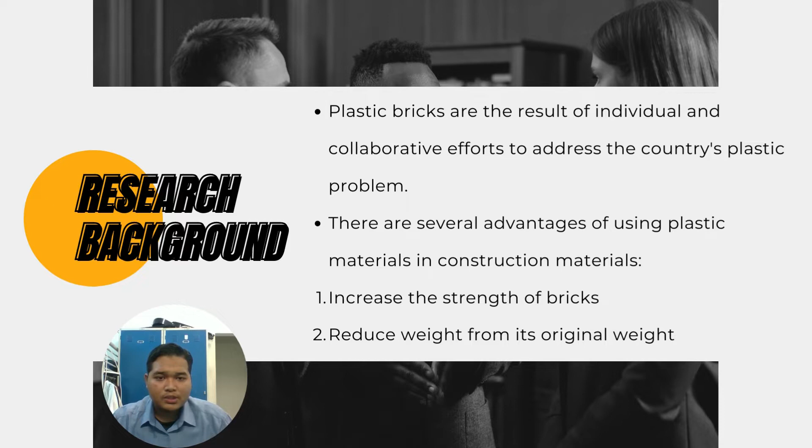Plastic bricks are the result of individual and collaborative efforts to address the country's plastic problem. The plastic brick movement advocates the personalized plastic brick technique in order to raise awareness of the implications and risks of plastic consumption. It also urges communities to take collective responsibility for their own plastic and use them to make valuable items through a collaborative process. There are several advantages of using plastic materials in construction materials, which is to increase the strength of bricks and reduce weight from its original weight.

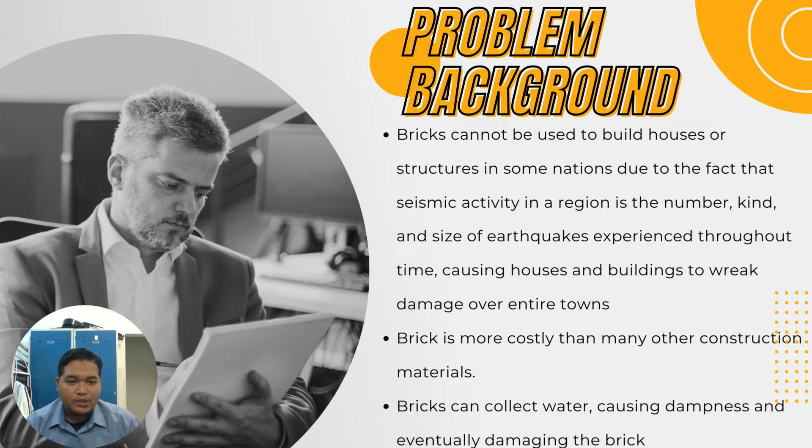The problem background of this research is, firstly, bricks cannot be used to build houses or structures in some nations due to seismic activity, the number, kind and size of earthquakes experienced throughout time, causing houses and buildings to wreak damage over entire towns. Secondly, brick is more costly than many other construction materials. And thirdly, bricks can collect water, causing dampness, which can impact the brick.

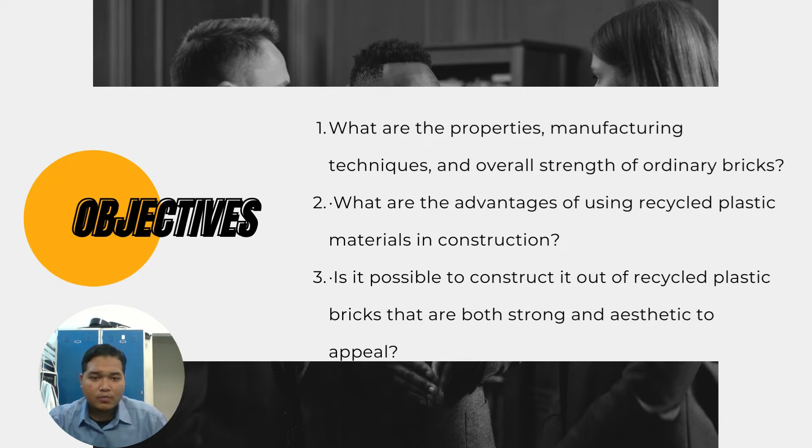Now we will move to the objective. There are three questions in the research. Firstly, what are the properties, manufacturing techniques, and overall strength of ordinary bricks? Second, what are the advantages of using recycled plastic materials in construction? And lastly, is it possible to construct recycled plastic bricks that are both strong and aesthetic?

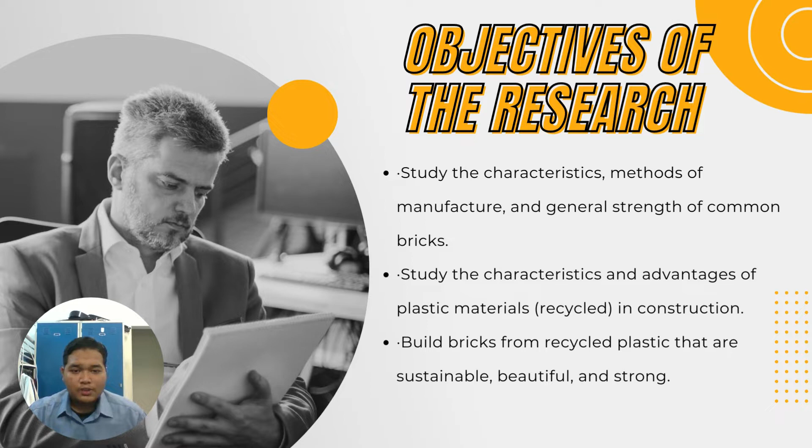Now we will move to the objectives of the research, which are to study the characteristics, methods of manufacture and general strength of common bricks, to study the characteristics and advantages of recycled plastic materials in construction, and to build bricks from recycled plastic that are sustainable, beautiful, and strong.

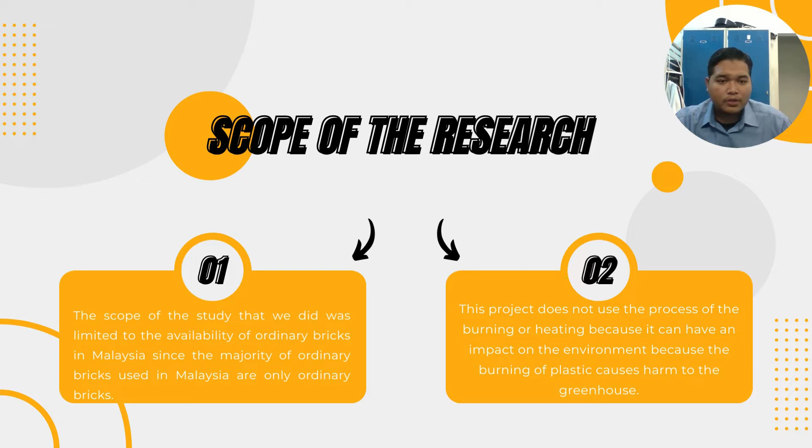There are two scopes of the research. Firstly, the scope of the study was limited to the availability of ordinary bricks in Malaysia, since the majority of bricks used in Malaysia are only ordinary bricks. Secondly, this project does not use the process of burning or heating because the burning of plastic causes harm to the environment through greenhouse gases.

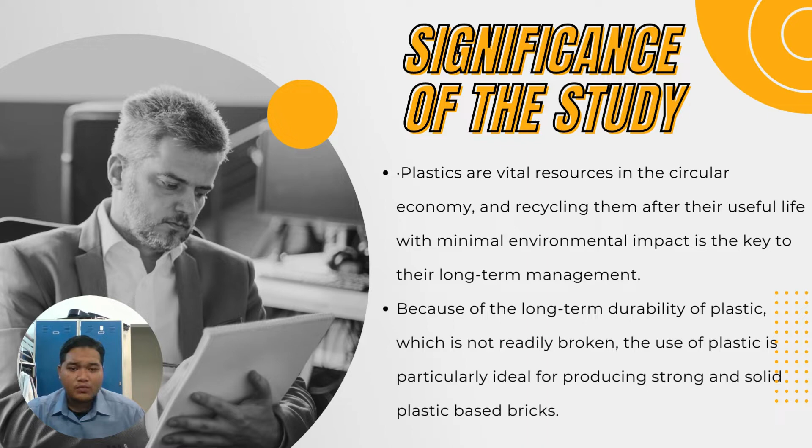The significance of the study is that plastics are vital resources in the circular economy, and recycling them after their useful life with minimal environmental impact is the key to their long-term management. Because of the long-term durability of plastic, which does not fully break down, plastic is particularly ideal for producing strong and solid plastic-based bricks. Next, I will continue this presentation with chapter 2, which is preparation.

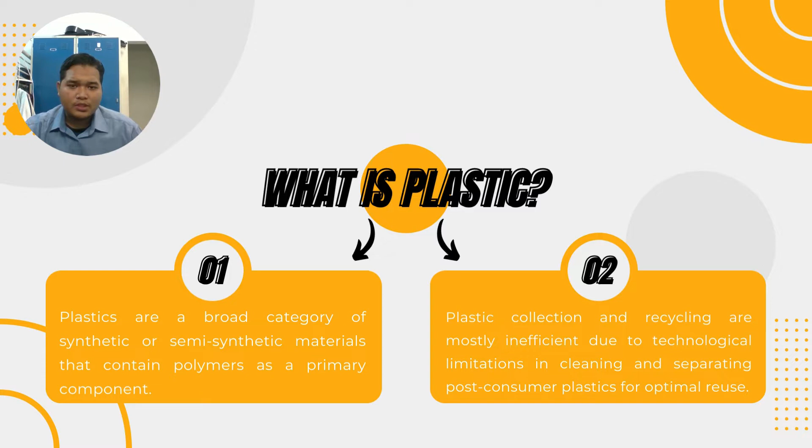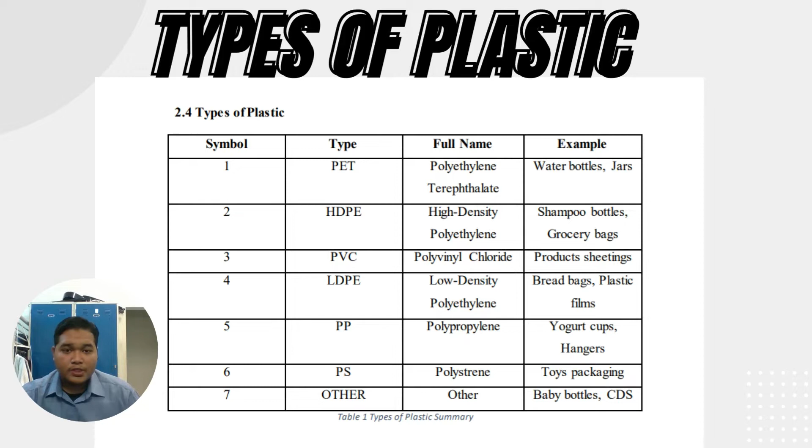What is plastic? Plastics are a broad category of synthetic or semi-synthetic materials that contain polymers as a primary component. Plastic collection and recycling are mostly inefficient due to technological limitations in cleaning and separating post-consumer plastic for optimal reuse. The table here shows the types of plastic. There are 7 types of plastic, which are PET, HDPE, PVC, LDPE, PP, PS, and others.

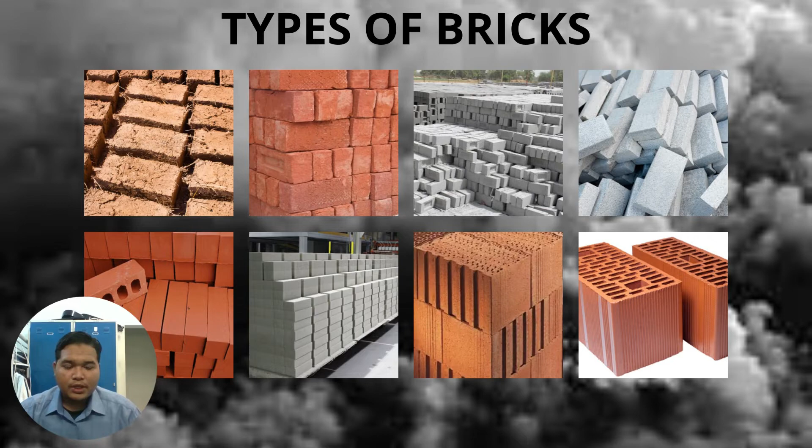Hello, Assalamualaikum. My name is Amirul bin Abdul Hamid. My matric number is AA200767. I would like to continue the presentation with chapter 3, methodology.

For the methodology, it includes the procedure and the process of the project. We start with a literature study of the specification, then a journal review, and then we prepare the procedure and mold for the manufacturing of bricks. Then we manufacture the bricks in the concrete lab at UTHM Pagoh campus. Then we test the compressive strength of the brick samples, and then we do the discussion. The project was finished after the discussion of the whole project.

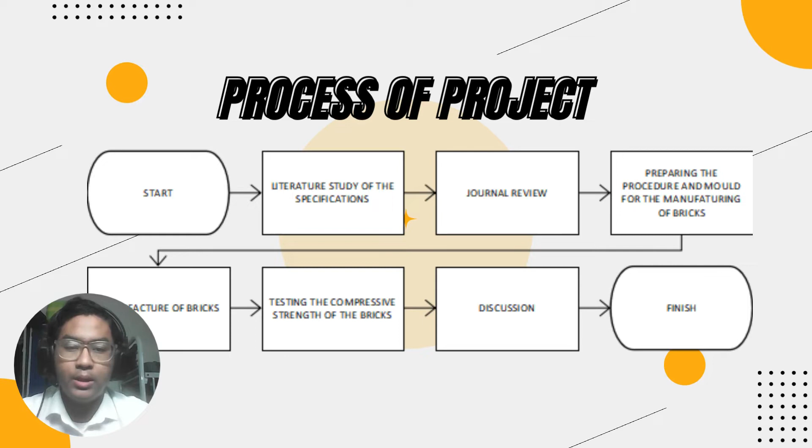We move to the plastic specification. To manufacture the plastic brick, recycled plastic is used in this research because it conserves money and time. Specifications of plastic that can be used: the type LDPE, low density polyethylene, for example bread bags and plastic films. Then PS, polystyrene, for example toy packaging.

And last but not least, PET, polyethylene terephthalate. An example of polyethylene terephthalate is the mineral water plastic bottle. For this project, we use PET plastic, polyethylene terephthalate. The example plastic we use for this project is the mineral water plastic bottle.

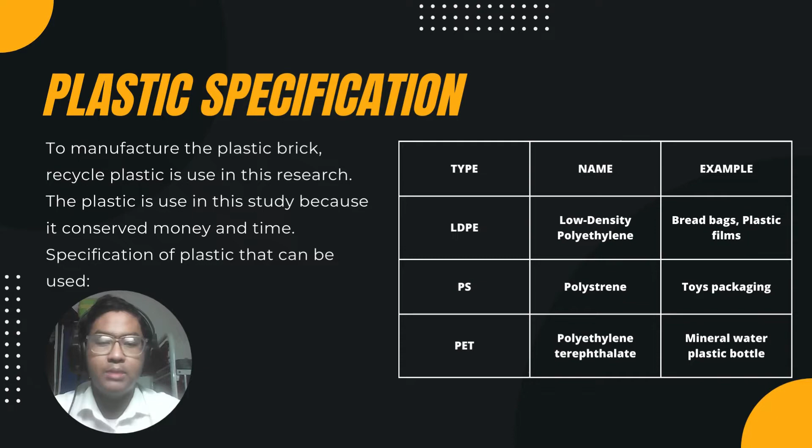One of the important items in this project is brick dimension. The dimensions of standard bricks vary per country and are stated as depth times height times length. They can be stated in imperial measurements such as inches or metric units such as millimeters. The mold size of the brick on this project is 220 times 110 times 75 millimeters, which means the length of the brick is 220.

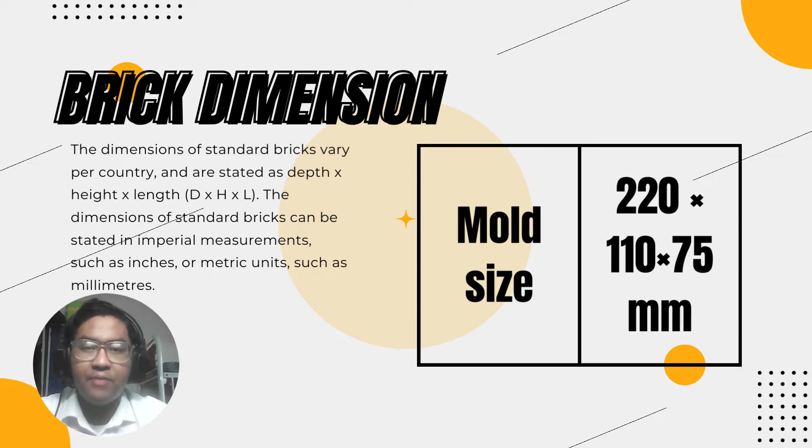All right, so we move to the procedure. The apparatus and tools. First, a mold made from steel with the standard size of brick, 220 times 110 times 75 millimeters. Next, a compressor. Next, a sieve machine. Next, plastic bottles of PET type, cement, and last but not least, sand retained on filter number 8.

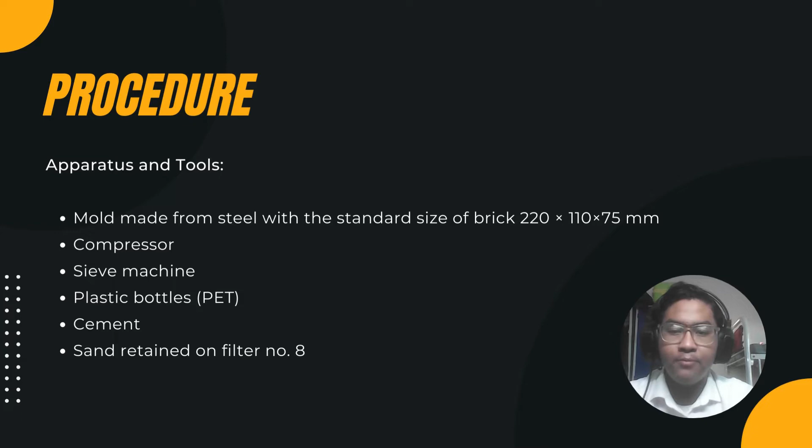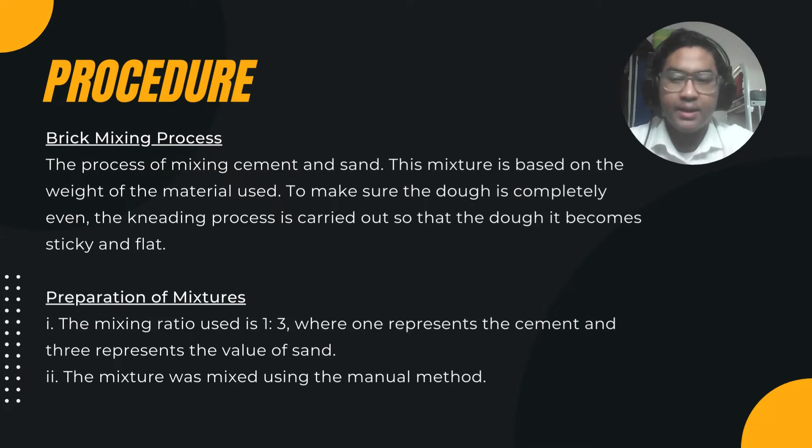Okay, for the procedure. First, the brick mixing process: the process of mixing cement and sand. The mixture is based on the weight of the material used to make sure the dough is completely even. The kneading process is carried out so that the dough becomes sticky and flat. Next, preparation of mixtures. Number one, the mixing ratio used is 1:3, where 1 represents the cement and 3 represents the sand. Next, the mixture was mixed using the manual method.

Okay, the process of compacting the dough into the brick mold. The cement brick mixture is put into a pre-prepared mold for 3 bricks. The size for each finished brick is 220 times 110 times 75 millimeters. The mixture is compacted to avoid cracks created in the middle of the brick and ensure the bricks are made evenly and perfectly.

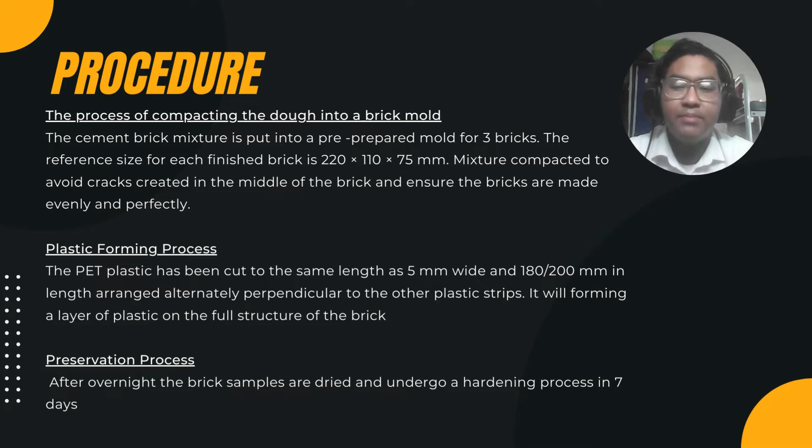Next, the plastic forming process. The PET plastic has been cut to 5 millimeters wide and 180 until 200 millimeters in length, arranged alternately perpendicular to the other plastic strips. It will form a layer of plastic on the full structure of the brick. Next, the preservation process. After overnight, the brick samples are dry and undergo a hardening process in 7 days.

Alright, after we manufacture the bricks, we must test the bricks with performance tests to get the data and analysis of the strength of the product and also the sustainability of the product and other analyses. So for this project, we use compression tests as performance tests on our project. In this study, several tests were conducted on these plastic mixed cement bricks. Among these tests is the compressive strength test.

First, place the sample in the center of the test plate with the flat surface of the sample. Next, make sure the concave side is at the top during the test. Next, apply compression at a uniform rate with a value of 14 Newton per millimeter square or 140 kilogram per centimeter square each minute. Do this until the sample fails and record the maximum pressure value.

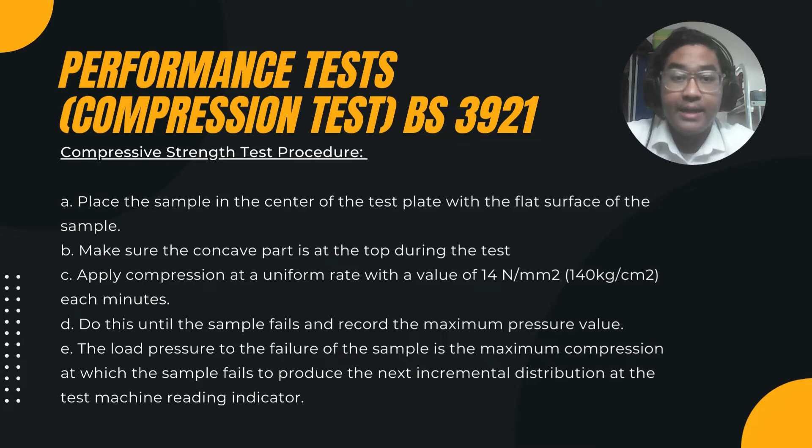So for the next chapter 4, I would like to call Ahmad Haikal to continue the presentation. Thank you. Assalamualaikum, my name is Ahmad Haikal bin Ibrahim, matric number 224. I'll be explaining chapter 4, which is data analysis.

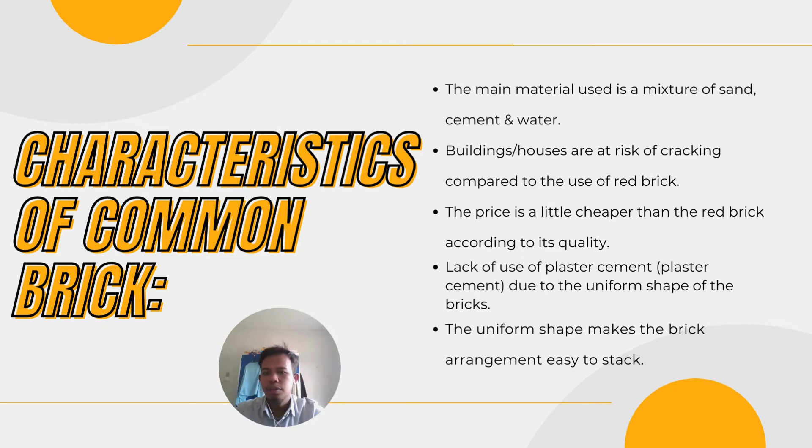Okay, for data analysis, we need to study the characteristics, method of manufacture and general strength of common brick. For characteristics of common brick, first, the main material used is a mixture of sand, cement and water. Second, buildings or houses are at a risk of cracking compared to the use of red brick. Third, the price is a little cheaper than the red brick according to its quality. Fourth, less use of plaster cement due to the uniform shape of the bricks. Lastly, the uniform shape makes the bricks easy to stack.

For methods of manufacturing common brick, first, make the mixture by mixing cement with sand, fly ash and lime in a ratio of 1:2. If using only fly ash or lime or a mixture without sand, then the cement composition is 17% of the mixture. Second, pour enough clean water into the mixture. The water should not be too much and not too little, as it can affect the bricks that will be produced.

In general, the water added is as much as 0.4 to 0.6 of the amount of cement used. Third, the mixing process must be carried out so that the mixture is completely smooth. The nature of the mixture should be changed to be homogeneous and the type designed accordingly, which ranges between 1.8 to 2.2 kg per liter. If the stirring is not finished, water needs to be added adequately.

4. After the mixture is done, the mixture must be formed with a special mold by pouring the mixture into a mold and then flatten the surface to dry and obtain a perfect result. The complaint was left for about 12 hours. 5. The next day, the dough is carefully removed from the mold. Then the mixture is transferred to an open drying place, but the place is protected from sunlight.

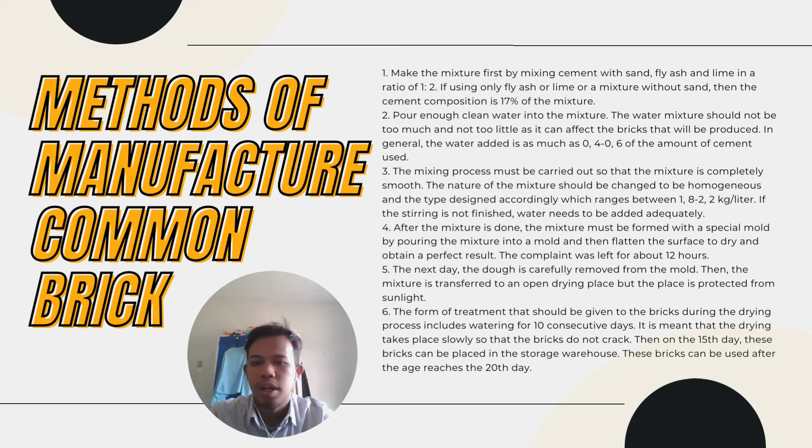And lastly, the form of treatment that should be given to the bricks during the drying process includes watering for 10 consecutive days. It is meant that the drying takes place slowly so that the bricks do not crack. Then on the 15th day, these bricks can be placed in the storage warehouse. These bricks can be used after the age reaches the 20th day.

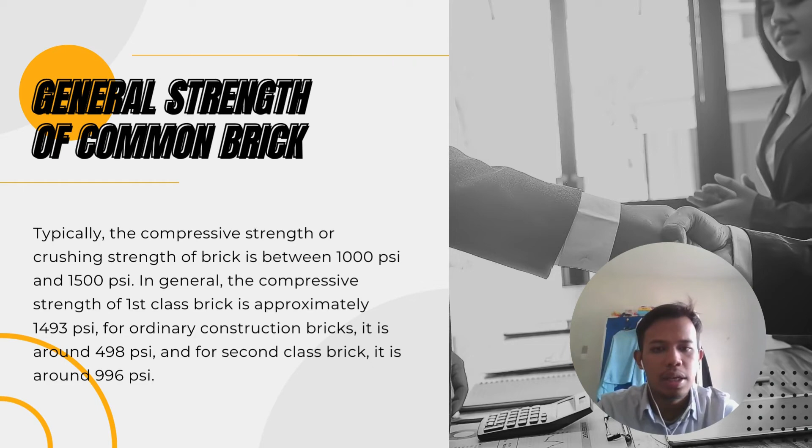Next is general strength of common brick. Typically, the compressive strength or crushing strength of brick is between 1000 psi and 1500 psi. In general, the compressive strength of first class brick is approximately 1493 psi. For ordinary construction bricks, it is around 498 psi, and for second class brick, it is around 996 psi.

For characteristics of plastic materials recycled used in construction, there are 6 characteristics, which is strong, durable, waterproof, lightweight, easy to move and recyclable. There are 3 advantages of using plastic in construction. First is lightweight. It is significantly lighter than concrete. Moving goods from one location to another requires significantly less energy. This not only helps with transportation, but it is also highly adaptable in terms of placing it underground, in apartments or in walls.

Second is waterproof. The waterproof nature of plastic makes the use of plastic materials in construction difficult to rot or damage. Lastly is recyclable. Recyclable plastics can help the environment from being polluted, especially to living things that can pose various risks, especially to the environment.

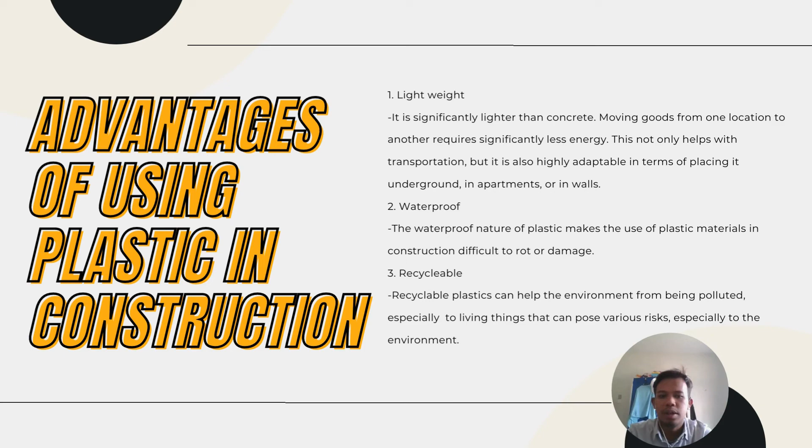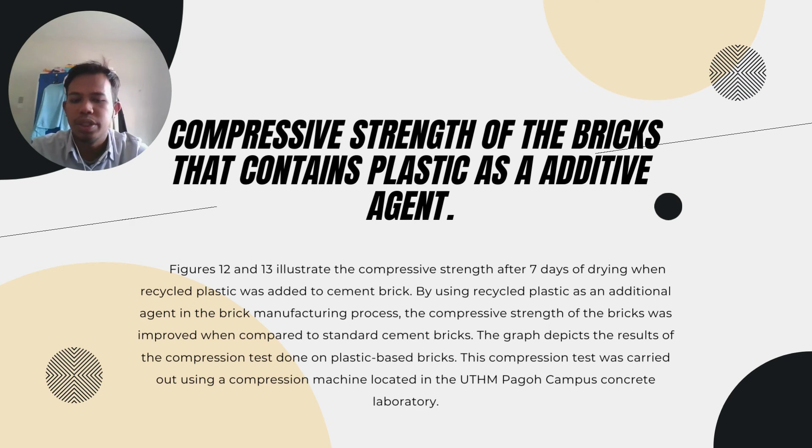Compressive strength of the brick that contains plastic as an additive agent. Figure 12 and 13 illustrate the compressive strength after 7 days of drying when recycled plastic was added to cement brick. By using recycled plastic as an additional agent in the brick manufacturing process, the compressive strength of the bricks was improved when compared to standard cement bricks. The graph depicts the result of the compression test done on plastic-based bricks. This compression test was carried out using a compression machine located in the UTHM Pagoh campus concrete laboratory.

Lastly, for compressive strength of the bricks that contain plastic as an additive agent, the study used a cement sand water ratio of 3, 1 and 0.5 in the process of manufacturing bricks from recycled plastic. The compressive strength achieved after compression for the data given in figure 12 is 45.71 MPa, while the compressive strength obtained for the data presented in figure 13 is 40.22 MPa. The average compressive strength of the two measurements was 42.97 MPa.

Based on the literature review of research that has been conducted, the highest compressive strength of 2.2 MPa was obtained using standard Portland cement and a cement sand water ratio of 0.8 and 0.625.

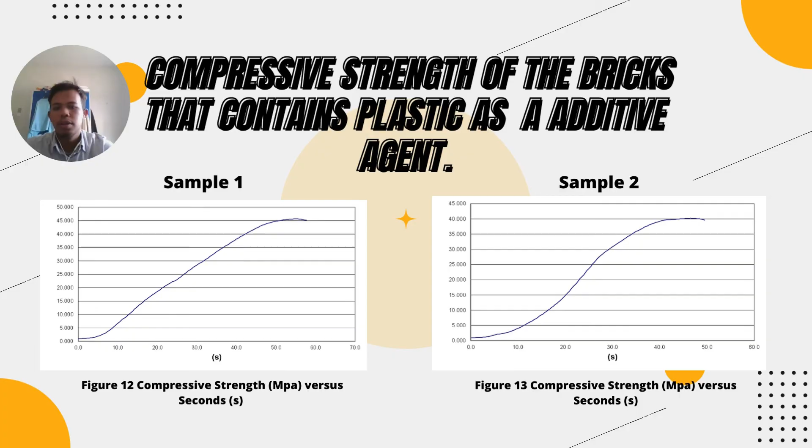Hi, back to me again.

For the data provided from the PCB 01 sample, the compressive strength obtained after compression is 45.71 megapascal, whereas the compressive strength obtained from the data for the PCB 02, the sample 2, is 40.22 megapascal. The two measurements' average compressive strength was

42.97 megapascal. The conventional Portland cement brick generates the highest compressive strength of 2.2 megapascal, according to the review of the study, with a cement sand water ratio of 0.8 and 0.65. Thus, it can be shown that plastic bricks are equally durable as traditional bricks.

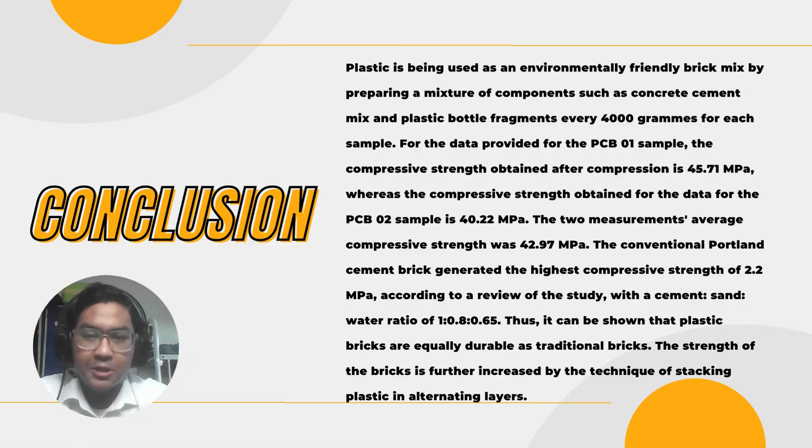The strength of bricks is further increased by the technique of stacking plastic in alternative layers, which is achieved in our project. All right, I think that's all from us, Group KA05.

Before that, we would like to admit that our project is not completely achieved of the objective and what we want. But we also hope our idea will not stop here. If we continue in the future, we can enhance the ideas to make a civil engineering material, not just bricks, made by recycled materials to keep our world safe and sustainable for the future.